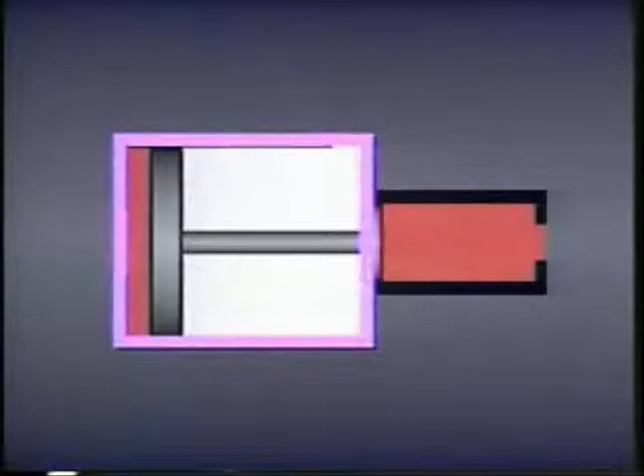Sometimes we need to increase the hydraulic pressure in a system. We can do this by using a device called an intensifier. Basically, an intensifier is a big hydraulic cylinder and a small hydraulic cylinder whose pistons are connected together with a piston rod.

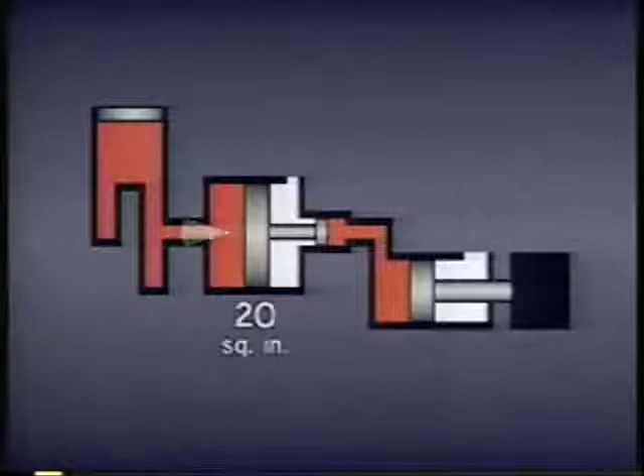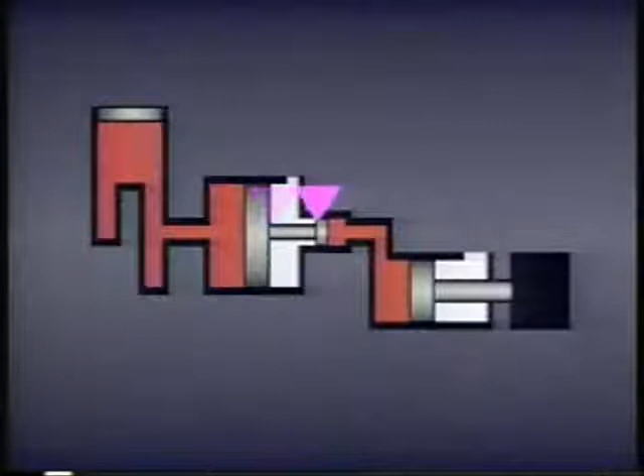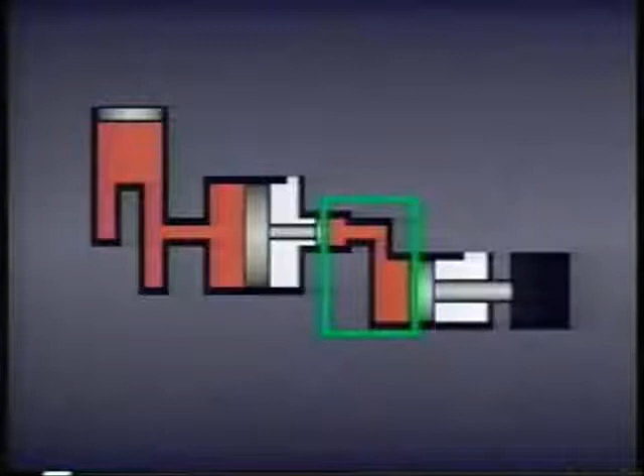To show how it works, let's apply an initial hydraulic pressure of 500 pounds per square inch against this large piston, which has an area of 20 square inches. This gives us 20 times 500, or 10,000 pounds of force, which is transmitted through the rod to the smaller piston at the other end. The 10,000-pound force is now being applied across only 5 square inches of surface, creating a pressure here of 2,000 pounds per square inch. So our initial 500 psi pressure has been intensified to 2,000 psi at this end.

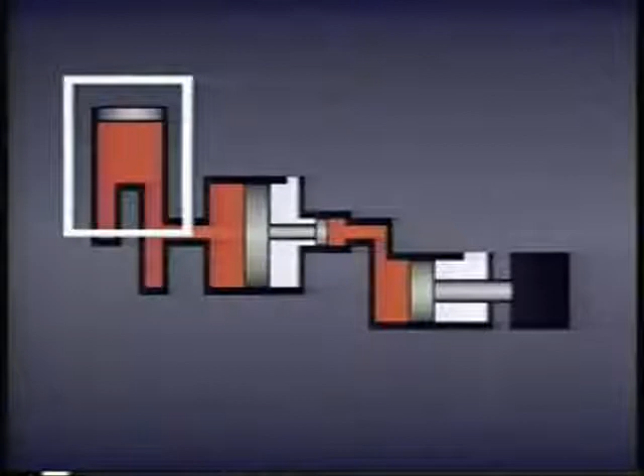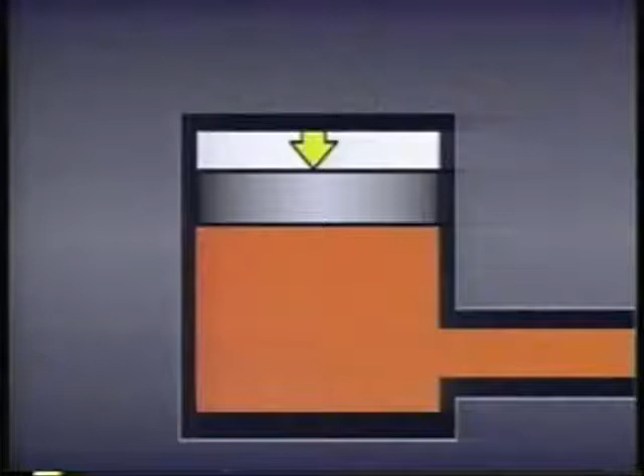Up to this point in our examples, we've used a force on a movable piston to generate our pressure. This device is called an accumulator. An accumulator stores hydraulic pressure as potential energy. This stored pressure can be turned into working energy, that is, flow and pressure. One of the drawbacks when using an accumulator is that it has a specific capacity. Once its fluid is used up, the work stops.

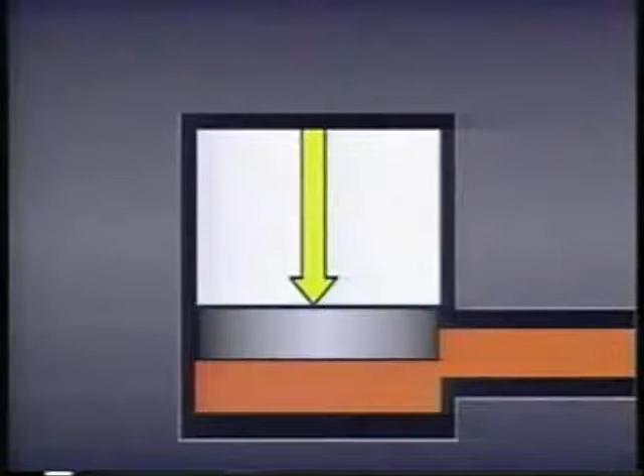To get around this, we need a way to provide a continuous flow. The device we use to do this is called a positive displacement pump. It has a plunger encased in a housing. The plunger is connected to a source of power, usually an electric motor, which moves it back and forth. There are valves connected at both the inlet and outlet ports, which allow flow in only one direction at a time as the plunger moves.

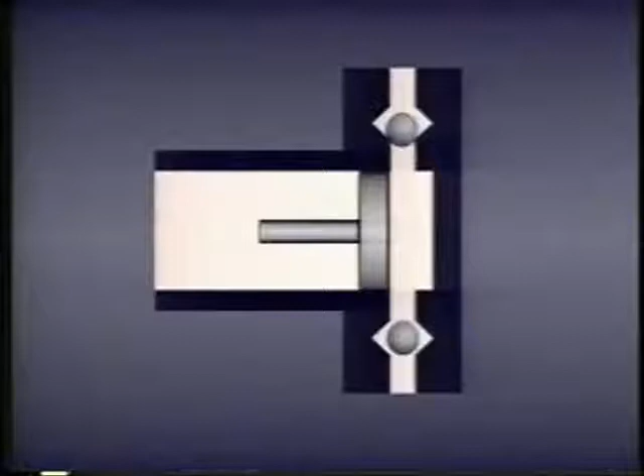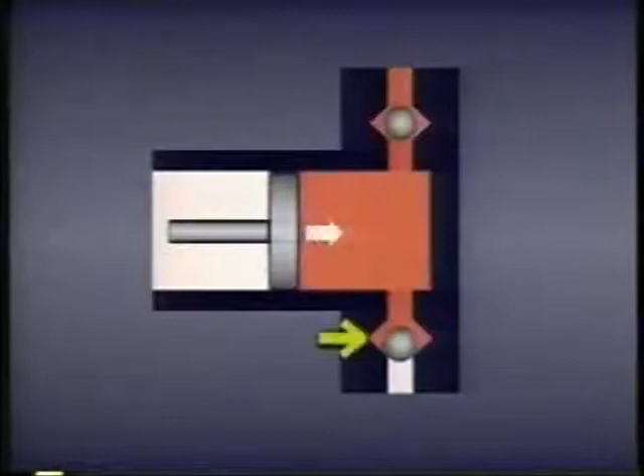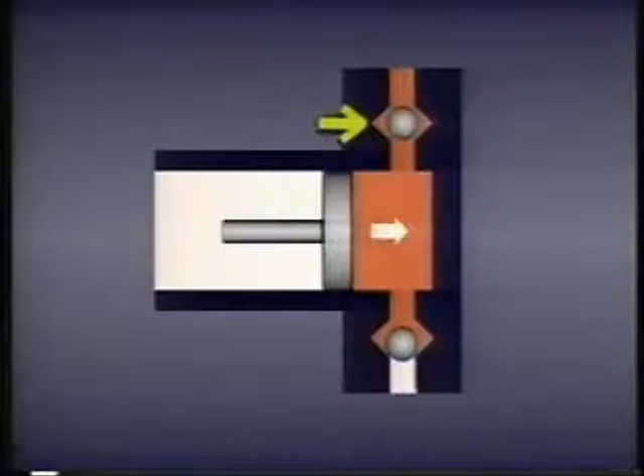When it moves in this direction, the volume inside the chamber increases. The inlet valve opens and fluid from a reservoir is pulled in, filling the chamber. When the plunger reverses direction, the inlet valve closes, and then as the volume in the chamber begins to decrease, the outlet valve opens, allowing the plunger to force the fluid out into the system. As the plunger cycles in and out, an intermittent or pulsating flow is produced.

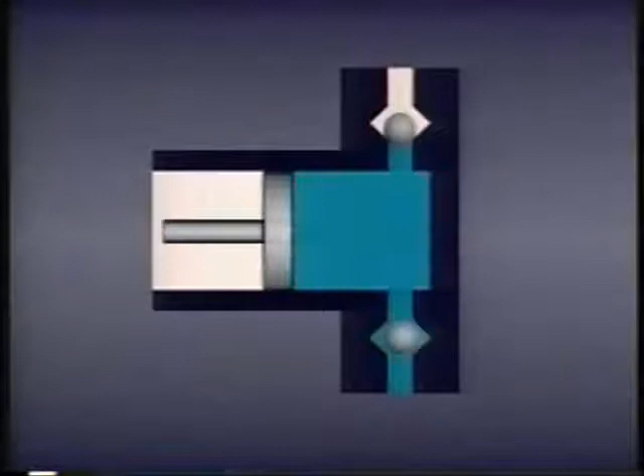Although reciprocating plunger pumps have a place in industry, usually in very high pressure applications, a more commonly used positive displacement type pump is the rotary pump. It's basically a housing with inlet and outlet ports and a rotating group which develops a smoother fluid flow and pressure. One style is the vane pump.

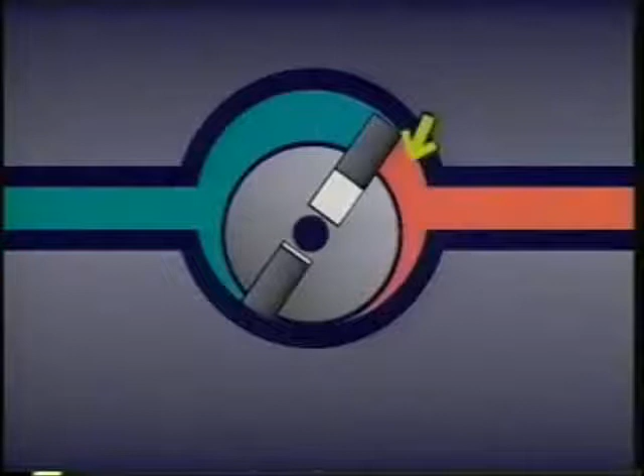In its simplest form, it looks like this. The rotating group consists of a rotor and movable vanes. The rotor is offset to one side of the housing, and the vanes are free to move in and out. When the rotor is turned, the vanes are thrown outward by centrifugal force, forming a positive seal here. The increasing volume here on the inlet side allows liquid to fill this area, while the decreasing volume on the outlet side here forces the liquid out into the system.

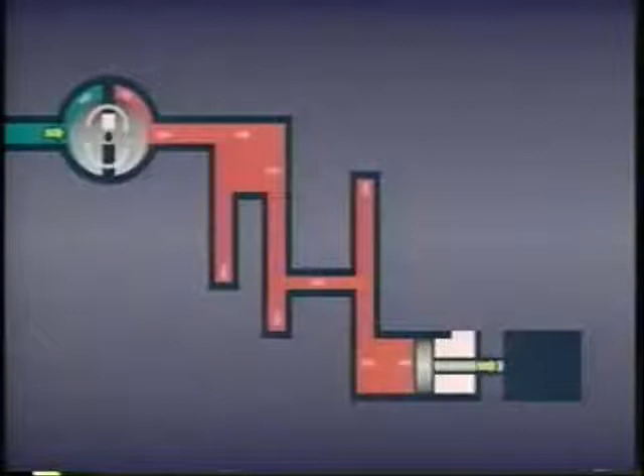In a hydraulic system, there is a direct relationship between pressure and resistance. How much pressure a pump develops depends on how much resistance it encounters. This resistance basically comes from two sources: the object's resistance to being moved and the fluid itself. If there were no fluid resistance, the pump would only have to generate enough pressure to overcome the object's inertia and friction. However, since fluid resistance is always present in a hydraulic system, the pump has to produce more pressure to overcome it.

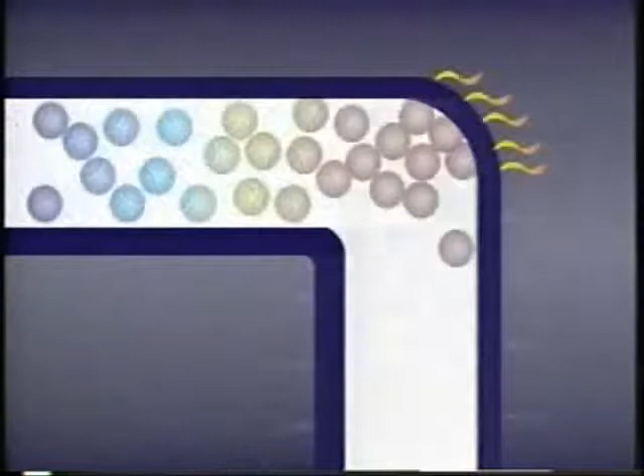Notice that the gauges indicate highest pressure here, close to the pump, and decreasing pressure here, here, and here, the farther we go along the system away from the pump. Since energy cannot be destroyed but can change form, this loss of pressure shows up as heat. It is caused by the friction of the molecules of the fluid rubbing against each other and the walls of the system piping. Hydraulic systems can be designed to reduce heat generation by minimizing the number of bends in the line and by using the proper size tubing.

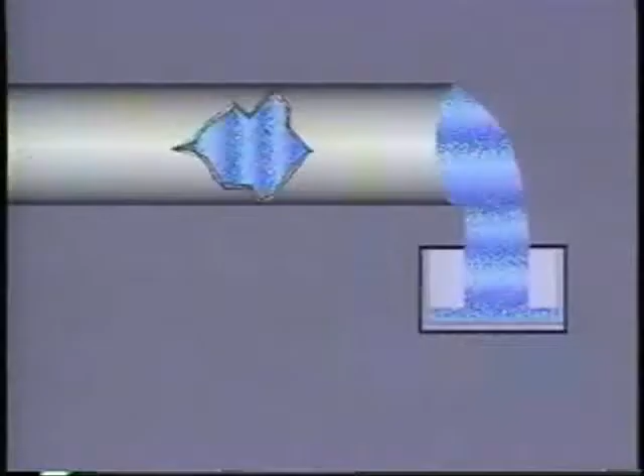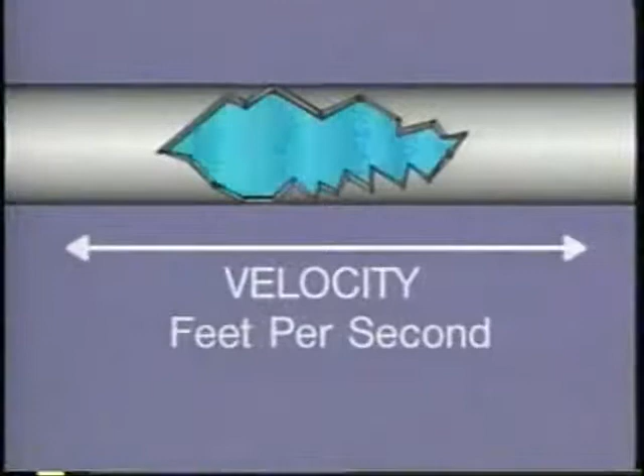Altering the size of the tubing can affect both the flow rate and the velocity of the fluid in the system. Flow rate is the amount or volume of fluid which moves through the system. It is usually measured in gallons per minute, or GPM. Velocity is the speed of the fluid as it moves through the system, usually measured in feet per second.

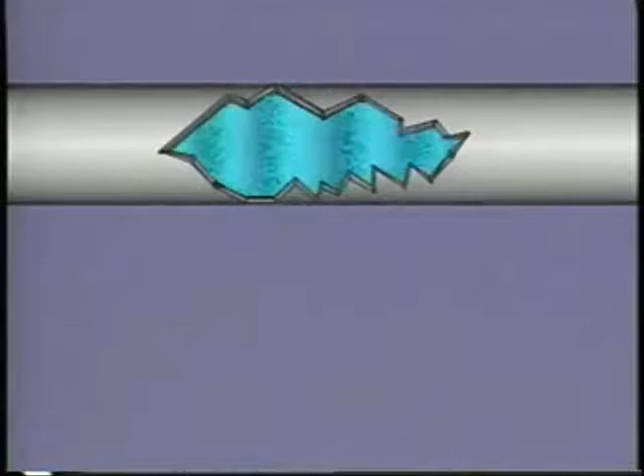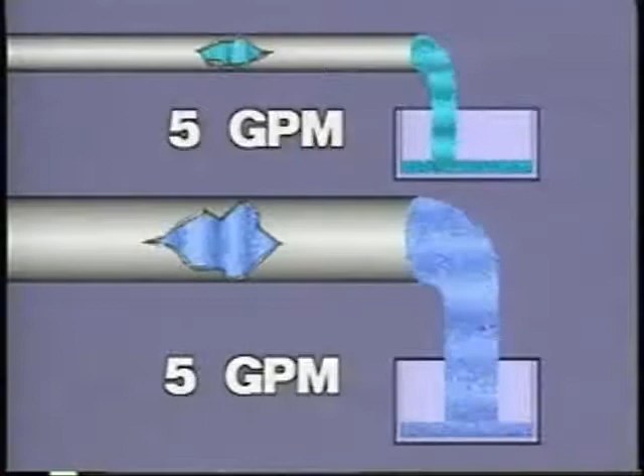Increasing either the flow rate or the velocity will increase the friction, and therefore the heat which the system generates. The relationship between flow rate and velocity can be shown with these two pipes. If we want the fluid to move through both pipes at a flow rate of 5 gallons per minute, the fluid moving through the smaller pipe will have to move faster than the fluid in the larger pipe. The additional friction caused by the faster moving fluid will create more heat.

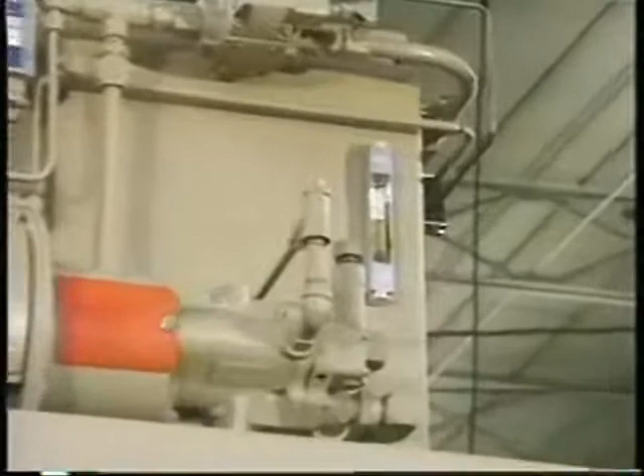Another factor that influences the efficiency of a hydraulic system is the hydraulic fluid that's used. In our next lesson, entitled Hydraulic Fluids, we'll take a close look at the various characteristics of hydraulic fluids and the effect they can have on hydraulic systems.